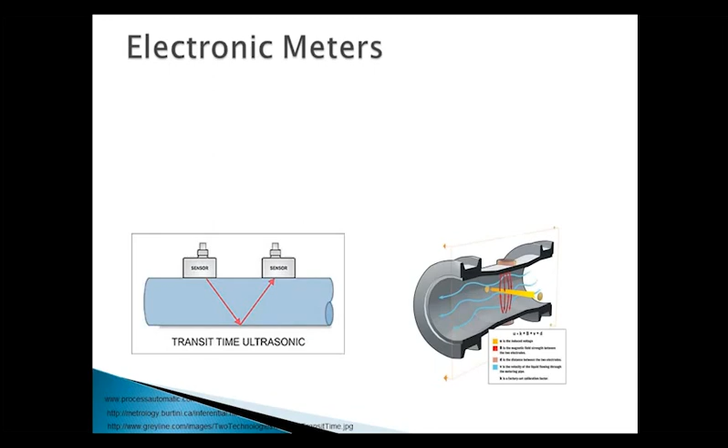Here's one example. We kind of break these down into two different groups here, mechanical and electronic, and that's done by sensing type. Some of the more modern era meters use sophisticated electronics, sound, or magnetic principles to detect flow or velocity, and then they convert that in a computer to usable information. Included in this group would be the mag meters, the ultrasonic, thermal mass, and the coriolis meters. We call these as a group electronic meters.

Then we get to the next group, and this is the most common technology, and this utilizes a sensing device directly in the flow path. The technology with the largest installed base, believe it or not, is one of the simplest. It's a VA meter. It's very simple. It just consists of a float contained within a tapered tube. So the faster the flow, the higher the float rides in the tube, and you can read your flow rate off the graduations.

As long as you can produce a linear representation of the variable, you can measure flow. So whether it's, as in the VA meter, a marking on the side, or whether it's a frequency that we're generating, as long as it's linear to the flow, we're good to go.

Some of the older technologies include turbines, oval gears, impellers, nutating discs, vortex shedding, even the differential pressure meters are in there. But they all have one thing in common, and that is they have some kind of device located within the flow path that either spins, turns, or wobbles in some way to provide a representation of the variable with a linear relationship to flow. And these are mechanical meters, and that's kind of what we're here to talk about today.

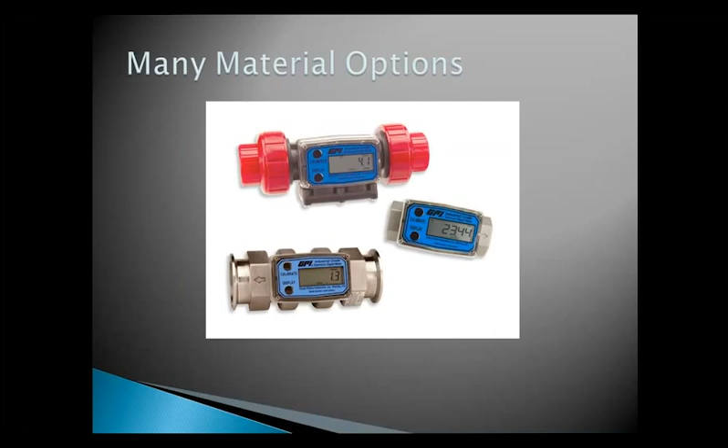But all of these considerations add up to value, and that's really what we're trying to generate - value either for our customer, or if we are an end user, for our company. Some of these are very simple, uncomplicated designs, and some are more complicated.

So we understand what the value equation is: benefit minus cost equals value. As we go through this, we need to look closely at what the benefit is - what is the one best thing that will bring the best value to the customer?

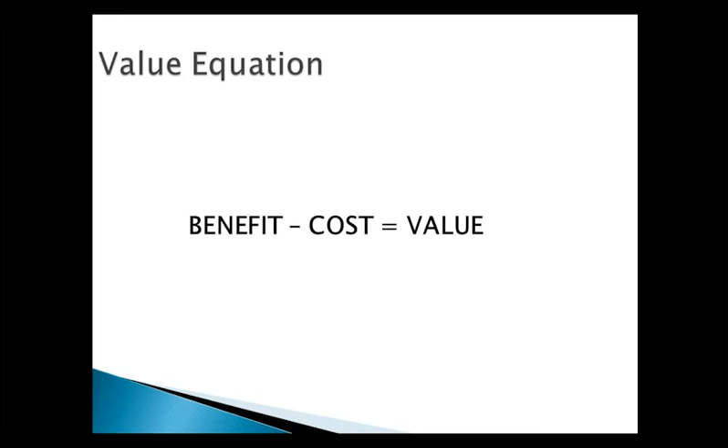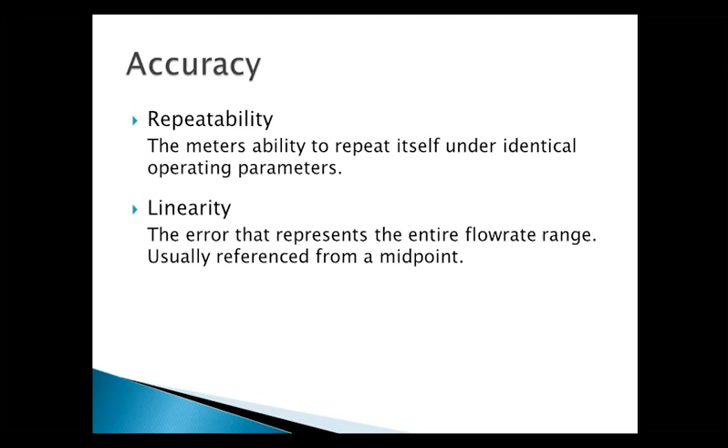One of the things I talked about before was accuracy, and this is always a big issue with people. I want to go through the two important points in accuracy and how these get represented by the manufacturer. There are two ways we can report accuracy and two things that affect it. Typically it will be stated as plus or minus X%, but the important factor is whether it's X% of full scale or X% of reading - there's a huge difference as we get into varying flow rates.

Here we have a chart that illustrates the difference in allowable error on two meters, both listed as plus or minus 1% meters. As we can see, if it's a percent of reading, that 1% goes from the very end of the flow range to the top. So whether I'm doing 1 gallon a minute or 10 gallons a minute is irrelevant - I'm going to be within my 1%, as stated by the manufacturer, all the way across.

However, if I've got a full scale meter - an example might be impeller meters, a little insertion meter - they'll typically go on full scale. Full scale is generally used where flow rate is the important factor, not the total. We need to keep that in mind as well.

As we get down to the lower end of the flow rate, a 1% meter flowing at 1 gallon a minute, even though that might be in the stated range, is going to be nearly 10% off. So on a 10-gallon dispense, if we go to totals, instead of having plus or minus 1% - 9.9 to 10.1, like on the reading meter - we're going to have 9 to 11. So you've got almost a full gallon of error there.

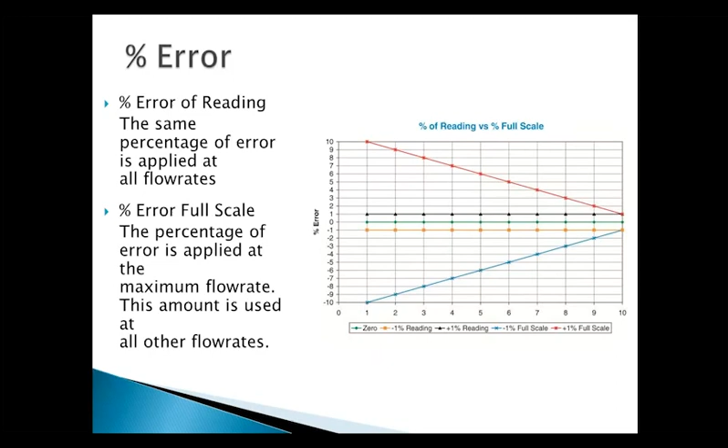The other thing is the absolute accuracy of the meter, and different applications require different things on this. So we can be accurate but not repeatable. If I am monitoring a flow rate, I want to make sure I've got about this kind of flow going through there.

If I'm looking at something I'm not really that concerned about but want to know - one example is people measuring runoff water for EPA. They want a pretty good general idea so they can report it. They're not that concerned, it's not a profit center, so they'll take plus or minus 2 or 3%, and they don't really care if it's repeatable either. Those meters - I know we have one that retails at $170 - you can do pretty well with those in those types of applications.

Repeatable but not accurate becomes a lot more application specific, and the application will define that. If I am blending a product and I know that when my meter says it's 10.3, my product is perfect, I don't care whether it's 10.3 or 10.8 or 11.2 in actual volume. What I really care about is that my blended product comes out the same every time when this meter says 10.3.

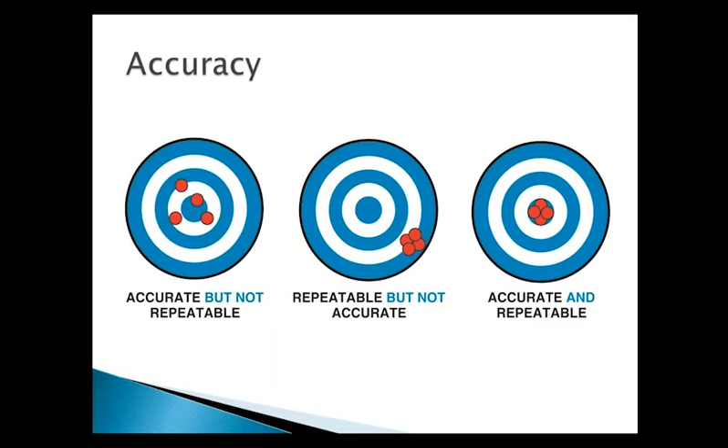So all of these things go together to make up a solution. If we didn't have problems with flow, we wouldn't be here. So what constitutes a solution? Does it solve the problem? Is it going to give the customer the things that he needs? Is that solution deliverable? Can we get it?

One of the things that happens a lot is we have this great solution, we go out and start looking for it, and yeah, we can get that, but it's 15 weeks later, or that's just in development, we can't quite get you there yet. So having a deliverable solution in the time frame that the customer needs is a big part of it.

Does it fit the sophistication level of the user? Once again, we have to take that into consideration. I'm going to treat a mom and pop organization with no real technical ability differently than I will a large company with an instrumentation engineer who's speccing everything in. Does it stay within the budget?

Boy, that's a big one. The budget is key in a lot of cases, and it's not always expense, but again, we're going to get back to, does it provide the best value? People are always looking for the value. They'll spend $10,000 if they're going to get $100,000 out of it. They're not going to spend that money to monitor a flow line that really doesn't produce anything. So we always have to make sure that the budget and value make sense.

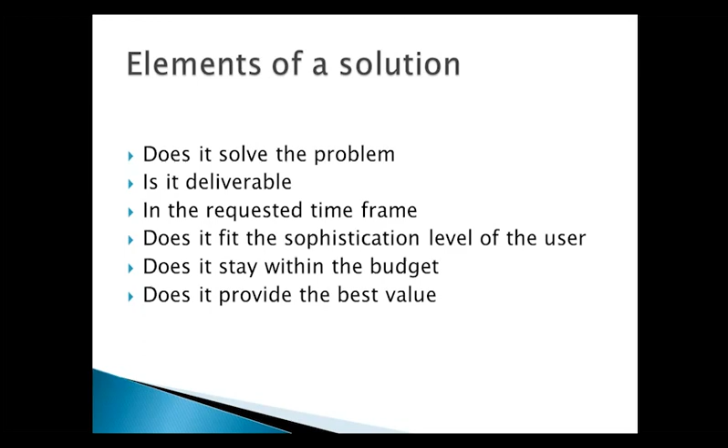So now that we've kind of gone through that, let's go through a little example. This is the Fairway Company, and this is all made up, by the way, so no lawsuits. They have an agent, and they inject this agent, and it modifies the viscosity of their pet shampoo.

The fluid has a range of viscosities. When it's warm, it's fairly thin, it's 10 centipoise, but when it gets cold, it is 100 centipoise fluid. It is a conductive fluid, and typically we're going to be running this about 3 GPM. It's stored outside, so that centipoise does go up and down, but no real radical temperature. We're putting this in our line at about 75 psi.

We don't really have any acid or base issues. It's a fairly neutral pH, and we're doing this with a piston pump, and we're using this meter as verification that the stroke length we've got set on our piston and the frequency that we've got on our pump is correct. But it's in a real small pump room, and I don't have any way to create a straight pipe run for it. All I'm looking for here is a total read, but I want it to be about 0.5% accurate.

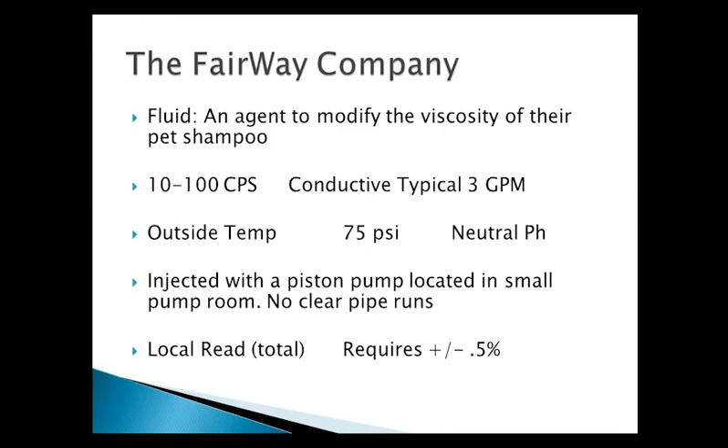So option one here, because it is important to our process, we could go to a coriolis meter, and that would certainly handle that issue. Very high level of technical expertise, however. I'm a small company. I really don't have an engineer here. I really don't want to go through all of that complicated setup and having to measure temperature and specific gravities and all those other things that go along with that.

Additionally, this is a high cost option. Coriolis meters tend to get up there pretty high in cost, so I'm going to be spending several thousand dollars. On the positive side, it's absolutely going to give me my accuracy, and it's absolutely going to be repeatable. I'm going to have everything that I need there. It's going to solve that part of the problem. But it's probably not the best value due to the high cost.

And additionally, when we get into higher cost meters, they tend to load those up with everything in the world. So I'm looking for a local total. I don't really need to have all of the outputs and all the different things that are going to be available and come with that.

Option two is a mag meter. It'll handle the fluid, but it probably doesn't handle the pulsating flow very well, because this is an inferential type of meter, and it's going to look at velocity, and then it's going to change that velocity into a volume. And the other thing about mag meters, since they are looking at velocity, they require flow conditioning. I've got to have my pipe runs, or I've got to put in flow straighteners. I can't have a lot of swirls and spins and stuff going through my line and expect this mag meter to function properly.

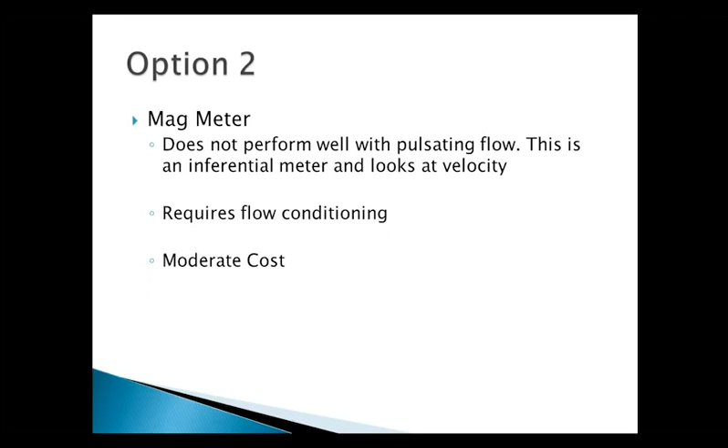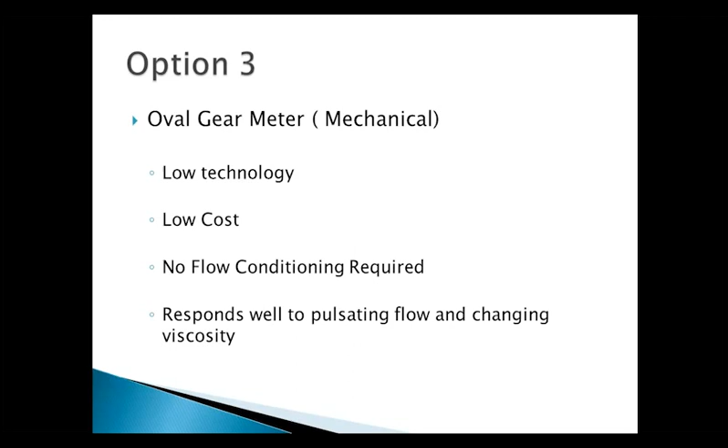They're coming down in price significantly, but it's still a moderate cost. Option three is the oval gear meter, and this is the mechanical meter. It actually has something in the flow path that's giving me a volume. It is a low technology device. I don't have to worry too much about anything going on there. They're going to be a low cost device, and because of the cramped quarters that I'm in, and I don't have clear pipe runs, this meter, as a positive displacement meter, has no flow conditioning required. Additionally, it's going to respond very well to pulsating flow and changing viscosities. So this pretty much hits the nail on the head as far as being able to handle the application and meet my budgetary requirements.

So the conclusion that we come to off of this, and I understand this was just one example, and since I made it up, I got to pick and choose kind of what I wanted to put in there. But there are all sorts of these applications out there. Many times a mechanical meter is the best solution in providing the value that we're looking for, due to cost, due to simplicity, due to a lot of different things. So don't assume that the newer technology is better. These meters were all invented at some point to solve a problem, and the fact that they can solve many various problems is kind of an added extra plus. If everything was all the same, we wouldn't have all the different technologies and the different ways to measure fluid that we have now.

And the last thing is never fail to ask the proper question. I kind of threw that in there because if we hadn't delved a little bit into the specifics of the application, if a guy just called up and says, yeah, I need to measure this agent that's controlling my viscosity, and I'm pumping it into the line as an injection, we really wouldn't understand what the nuances of that application were. We wouldn't have understood budget requirements, we wouldn't have understood space restrictions, things like that. So I hope this has helped.

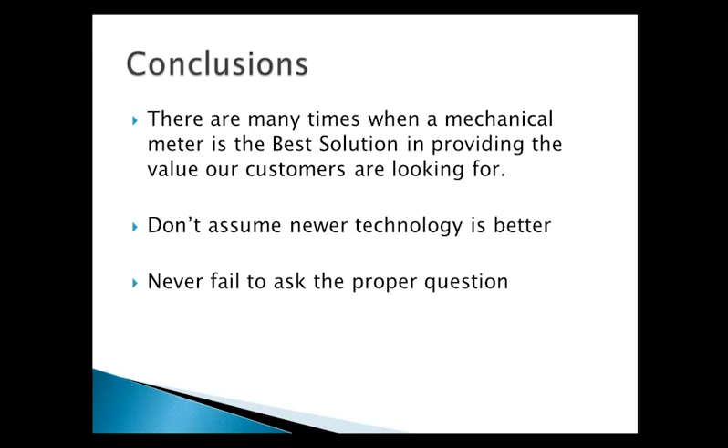I know this is kind of a short little session here, but the end result is that mechanical meters do offer a better result in a very, very high percentage of the applications. So when you're going out looking for things, your customer has a solution, or your customer has a problem that you're trying to come up with a solution for. Make sure that you're considering all of your options and not just going in and saying, oh yeah, here's a mag meter, here's an ultrasonic meter, here's something just because it's the new sexy technology.

So that concludes my part of this. If anybody has any questions or comments, love to hear them.

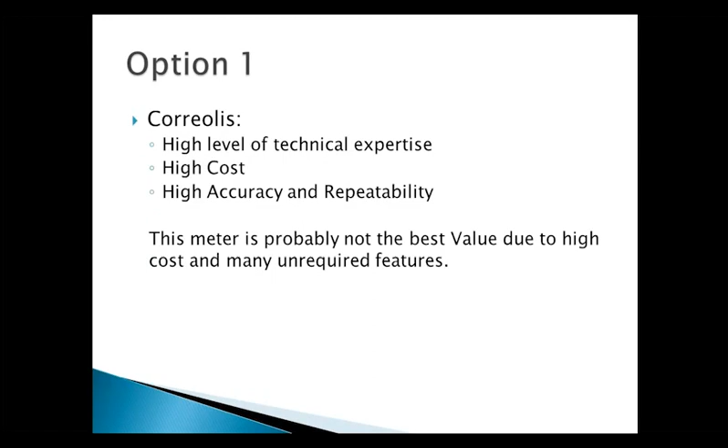All right, the next question, I'm not quite sure what the question is, but I'll read it to you. Are you going to describe mechanical meters and show some different types? I think we went through that. Okay, why don't you go back here?

Sure. Okay, so here is a group of mechanical meters. These all happen to be positive displacement meters, but at the top we see an oval gear, and basically that is two oval-shaped gears that set at 90 degrees from each other. When they turn, as we look at number 3, or the bottom of number 3 or the top of number 1, you will see that there is a small pocket formed between the flat side of the gear and the housing, and that is actually the measuring chamber. The volume contained in that chamber is known very, very accurately, and that's why we don't have much slippage, because the length of that oval gear and that measuring chamber has to be extremely precise, within 10,000ths of an inch. You basically get a capillary seal there, is all you get. So as they rotate, that chamber just switches sides.

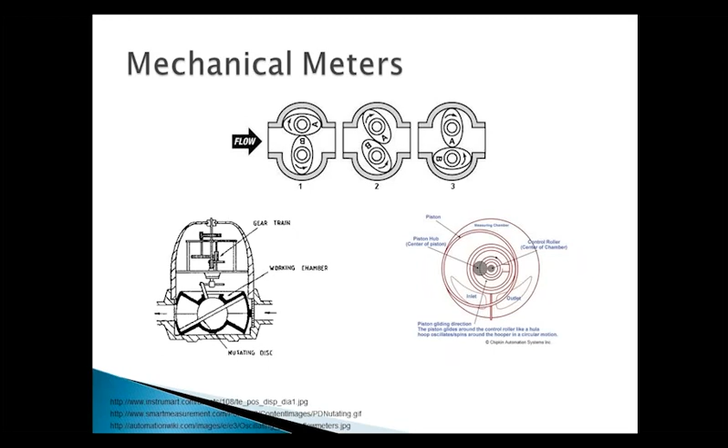The nutating disc, kind of the same thing. That is also known as a wobble plate, but it doesn't spin, and this is the one on the bottom left of the slide there. As the fluid comes through, it makes that meter wobble, and it sets up again a known cavity for the fluid to fill up. Same thing on the oscillating piston.

Let's see what else we have up here. Here we've got a vortex shedding meter. I included this in mechanical simply because it does have a bluff down in the flow path. As you can see there, it relies on a piezoelectric sensor to look at the swirls. And as we change that flow rate, the frequency of the vortices coming off of that bluff will change. And as it turns out, that is a linear equation. We talked about needing something that was going to be linear in relationship to the flow rate. So the faster the rate, the faster my vortices come off, and I can sense those with that piezoelectric sensor.

The pressure differential transmitter really doesn't have any moving parts, but it is mechanical in nature, so we included that here. Several different types of that, whether it's just a restriction in the line of some kind, like a wedge meter, or any kind of tapering in the line. That's going to give you something that's linear to the flow rate.

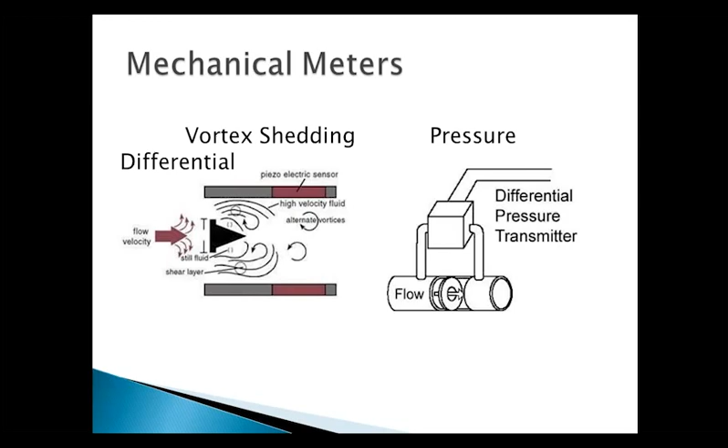On our G-series higher accuracy meters, they'll run those, bring them back out, pull the internals out, and make corrections to that. Sometimes it's filing off the back edge, sometimes it's putting a little more twist in it, sometimes it's taking a little twist out. We can tweak those to where we get from 100 to 1,000 pulses per gallon across the 10 to 1 turn down range. So you can make that turbine do about whatever you want it to do.

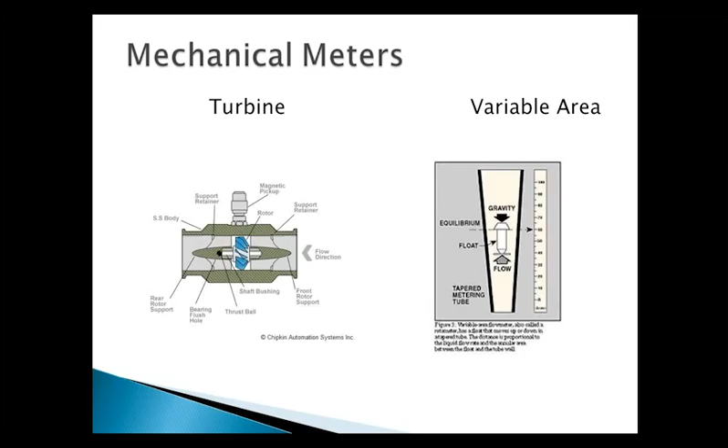I don't have any further questions. Bruce, thank you very much again.